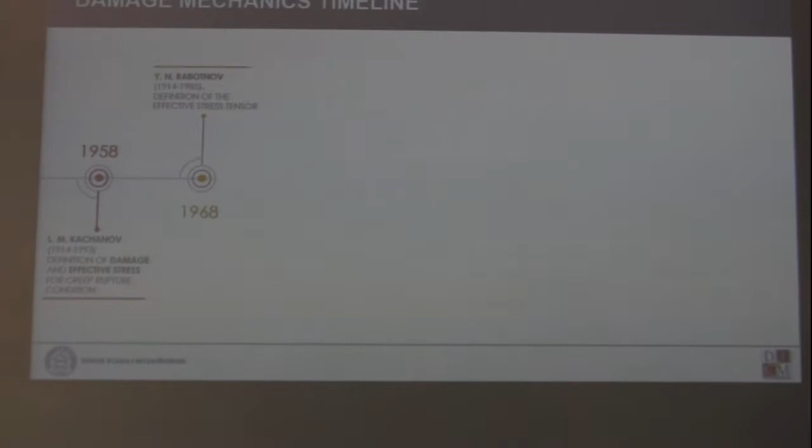Another seminal work was done by Rabotnov in '68, almost 10 years later. Going through the decades, a very important year is 1977, in which Gurson proposes, as a result of his PhD thesis, a continuum theory of ductile rupture by void growth. He first introduced the idea that a material that is pressure-insensitive can become pressure-sensitive as soon as damage develops in the form of microvoids.

Same year, the first concept and definition of continuum damage mechanics was introduced by Janson and Hult. Also in the same year, Lemaitre and Dufailly published the first paper on continuum damage mechanics, devoted to describing ductile damage mechanisms in metals and alloys.

Later, starting from this year, a number of papers were published, and a lot of work was developed mainly in France and in Europe, and just later in the United States, by Lemaitre and Chaboche.

They introduced in '78 the state principle for irreversible thermodynamics, which is the part of the work that I will address more in my presentation. Chaboche already in '81 proposed the use of continuum damage mechanics for ductile crack initiation in metals, and gave some guidelines on how to use this concept.

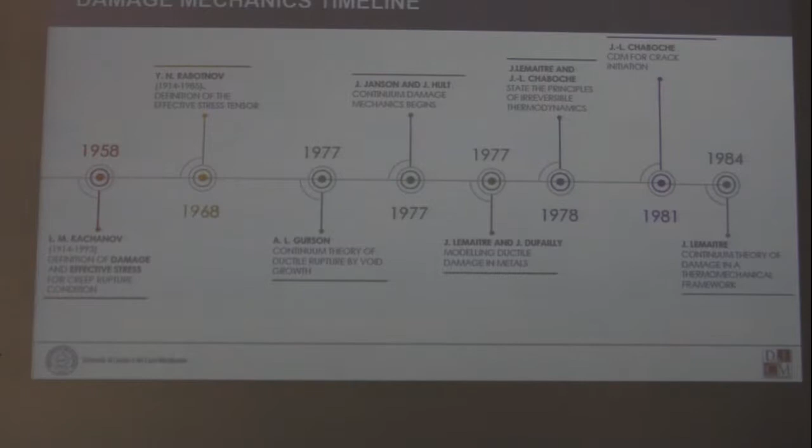Probably the most seminal paper is the one of Jean Lemaitre in 1984, where the first continuum theory for damage within the thermodynamic framework of irreversible processes was published.

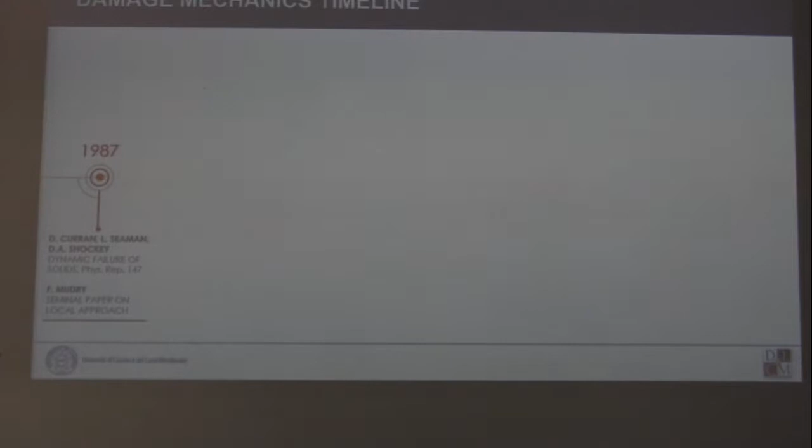In the subsequent decades, very important work was done in the Los Alamos community by Curran, Seaman, and Shockey. This community was highly focused on the high strain rate behavior of materials, so they were looking for a description of the material and failure of material under very severe conditions. I will spend some words also on this area, which is part of the area that I'm working in with my co-workers.

Already in '89, we see the first review of review papers on damage mechanics. It means that damage mechanics was already in '89 a consolidated body of knowledge, with a community that was working full-time in this area. Later, starting from '89, most of the work in continuum damage mechanics was dedicated to trying to correlate experiments with theory.

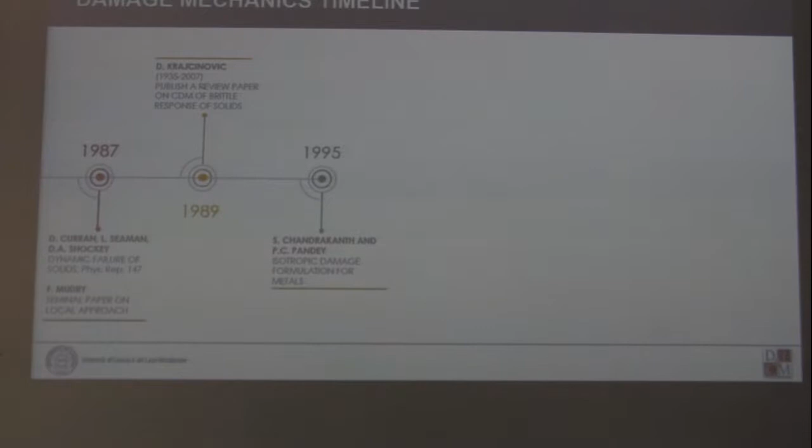Because up to '89, most of the work was basically theoretical, with no connection with reality, no connection with experiments, and this had some drawbacks that I will discuss immediately after this. In 1997, I published my first paper in damage mechanics.

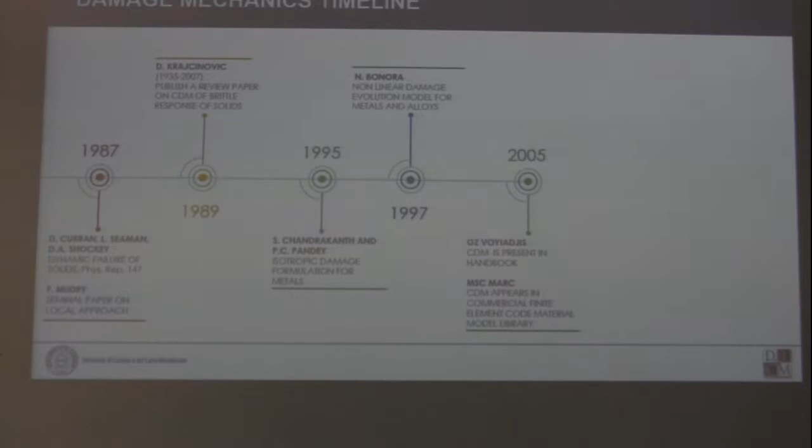I have to say that my work in damage mechanics comes basically because I was trained in a community at the University of Rome La Sapienza that came from modelers, but modelers who thought at that time that a model has to be theoretically sound, not necessarily supported by experiments.

So it was a turning point at that time. I would say probably in 1995 we see a shift from a different way to do research in the mechanical area, in which everything was theoretically equation made by hands, solved by hands. The beauty of the model was the consistency of the formulation, the possibility to find the closed form solution. Experiments were seen as something not necessary to support the theory.

For instance, if you go back now to the paper of Kachanov, it is today one of the most cited papers in damage mechanics, and you read it today for creep, it has nothing to do with the physical creep process going on in the material. So it's a completely useless paper, but it's beautiful from the theoretical point of view. You start from some first principle concepts, derive some evolution laws. The fact that it has nothing to do with reality is not important. There's no experiment, no experimental data point in any of these papers up to the beginning of the 90s.

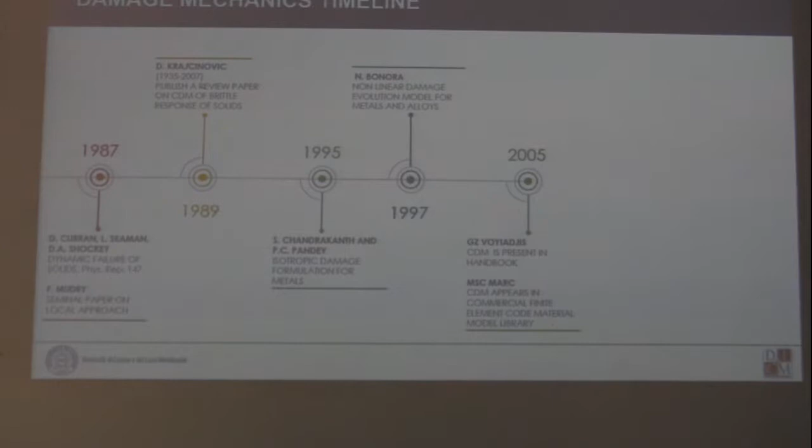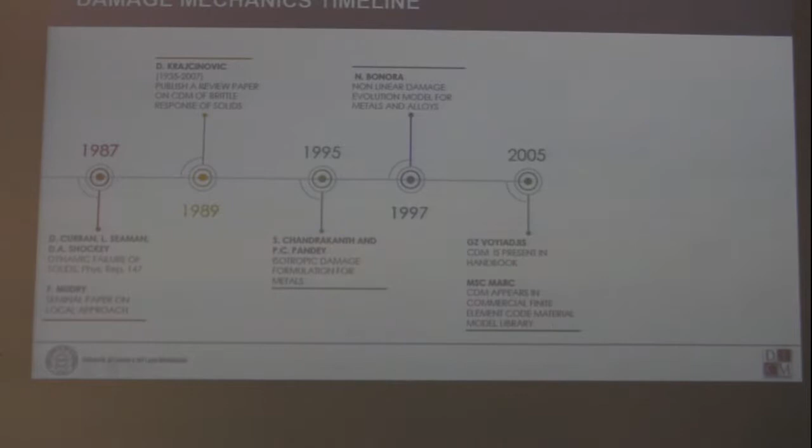Since then, this was also the year that I started working in the United States, and I had a different kind of approach, more practical, in which you have to show that what you are developing has a practical applicability. So you have to provide physical evidence of the validity of your modeling approach. We spent a lot of time trying to provide experimental evidence to support model validity and to validate models.

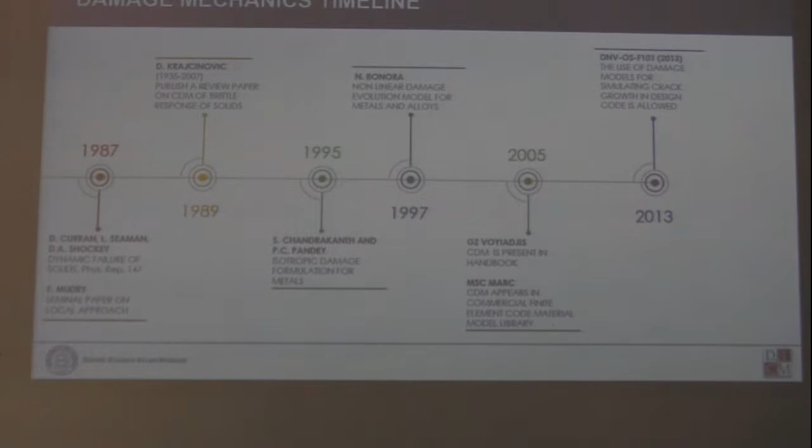In 2013, the use of damage mechanics is allowed for the first time in design codes, such as the DNV. The DNV F101 is the design code and prescription for pipelines. So for the first time, these new concepts are allowed into the design of real components.

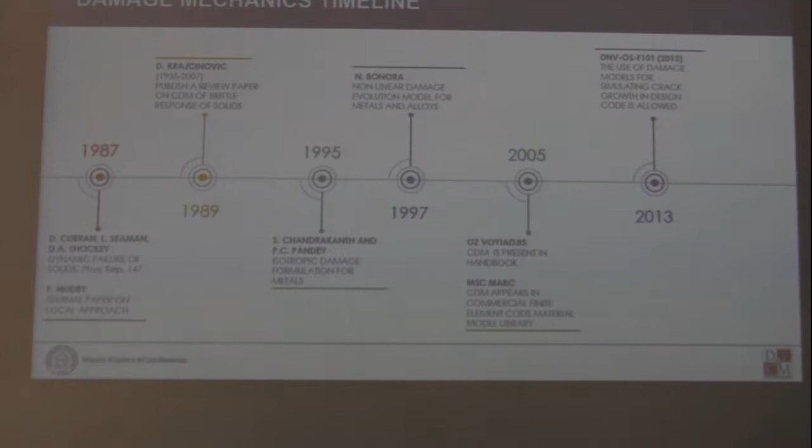During these years, I can tell that, besides a huge number of papers published in the literature, there are very few concepts that I call seminal concepts in damage mechanics that have been developed, and the value of continuum damage mechanics stems from the concepts that I'm summarizing in the next few slides.

The first is the concept of damage. The concept of damage in damage mechanics is different from the fracture mechanics community. The idea is that the classical crack initiation for fracture mechanics people is probably something in the range between 0.01 and 0.1 millimeter as an initial crack, or a physical crack, short cracks.

In damage mechanics, there is a more distinguished length scale in which there is a world before the initiation of a macroscopic crack that is assumed in the range of 1 millimeter, and below this length, this is the range where continuum damage mechanics works. As soon as you have a nucleation of the macroscopic crack, this becomes the matter for fracture mechanics concepts.

The other idea is the fact that there exists a critical state, and this final state corresponds to the macroscopic crack initiation. So we define in damage mechanics what is the end of some degrading process into the material that will turn out in the formation of macroscopic cracks, and continuum damage mechanics is dealing with everything that happened before.

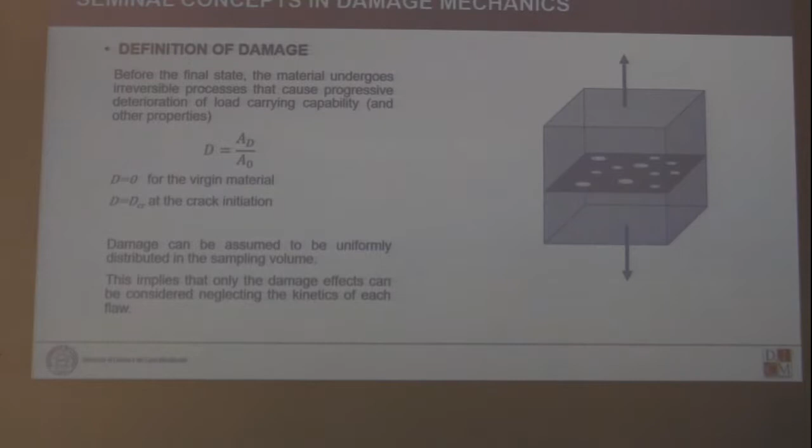This is really a turning point, because we detach from the physical description of the damage ongoing into the material, and we describe that damage state, which can be as complex as we want, as the sum of the effects that reduce the material's load carrying capabilities.

Another seminal concept in damage mechanics is the concept of effective stress. The effective stress is derived from this approach, in which we say that if we have some damage, we can deal with a material — this is the virgin material, where we have no damage. If there is damage, we have a distributed damage, and under stress sigma, or under a force F, we will have the force is sigma times dA, where dA is the effective net resisting area.

But instead of dealing with this complex problem, we can deal with a virtual material that has no damage, but has some degraded properties. This is a turning point, and in this equivalent material, the stress is no longer sigma, but a higher stress, which accounts not only for the reduction of the area, but also the concentration of stresses. In doing this, we have the possibility to get rid of the peculiarity of each damage form, shape, and evolution into the material, and just capture, outside the boundary of our body, what is the detrimental effect.

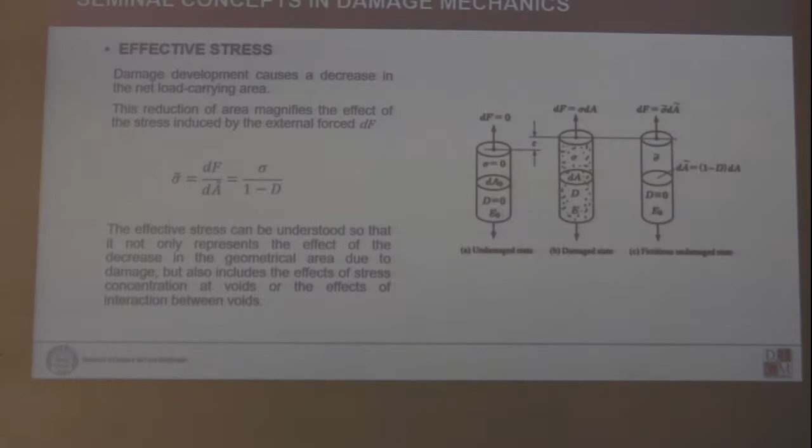This gives us also the possibility to develop a constitutive theory, which is derived into the framework of thermodynamics of irreversible processes using internal variables.

I summarize the three important steps necessary to develop a constitutive model in damage mechanics. The first is the definition of the state variables, which are defined as observable or hidden variables. The observable variables are those we can measure experimentally. The hidden ones come from the model, so they cannot be measured directly, but can be derived.

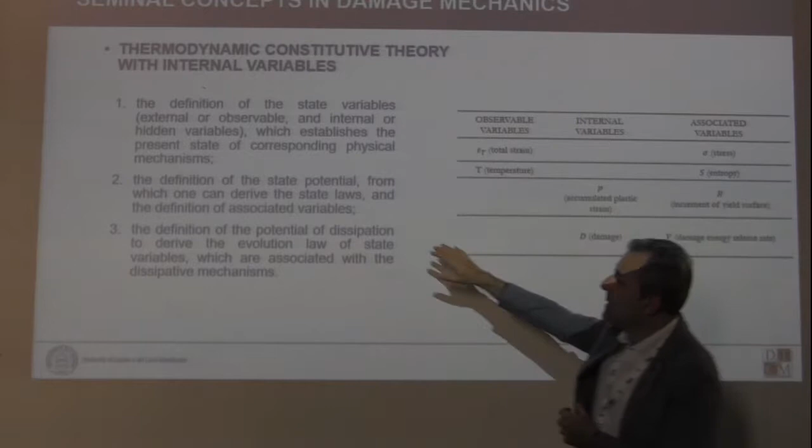We have to define the state potential, from which we can derive the state laws by derivation. Finally, we have to define the damage dissipation potential for the evolution of the state variables, which are associated with the dissipative mechanisms. These are just three basic rules and steps that can be used to develop a consistent thermodynamic model.

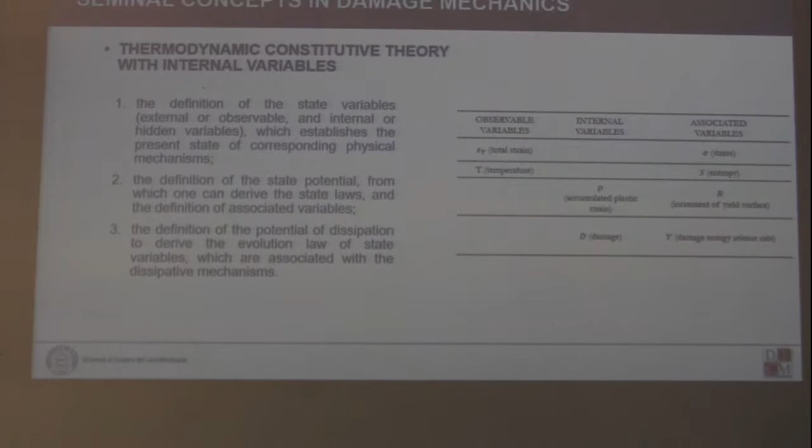In continuum damage mechanics, by the use of the effective stress, we can simply assume that the constitutive equations for a damaged material are the same set of equations for a virgin material that come from continuum mechanics, just simply replacing the stress with the effective stress.

So the system holds, but we have to introduce now an additional state variable, which is the damage, for which we need a damage evolution law. The damage evolution law can be derived by providing the damage dissipation potential.

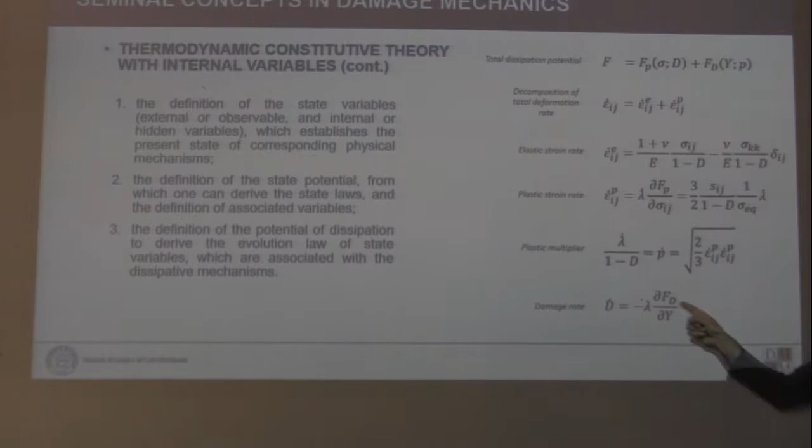The damage dissipation potential has to verify some principles. But at the very end, the important part is one of the beautiful seminal concepts derived in this framework.

For each variable there is an associated variable. Stress is associated to strain. Damage is associated to the variable y.

The variable y has a physical meaning, because y is the damage energy release rate, which is not the Griffith criterion, but is the strain energy release rate that is released when the damage state, which is distributed into a reference volume, releases the strain energy. So there is an equivalence also with fracture mechanics, because this is the same concept that Griffith formulated for a crack, for a propagating crack.

But here we don't have a crack. We have a smeared crack into the volume, and this quantity can be physically measured.

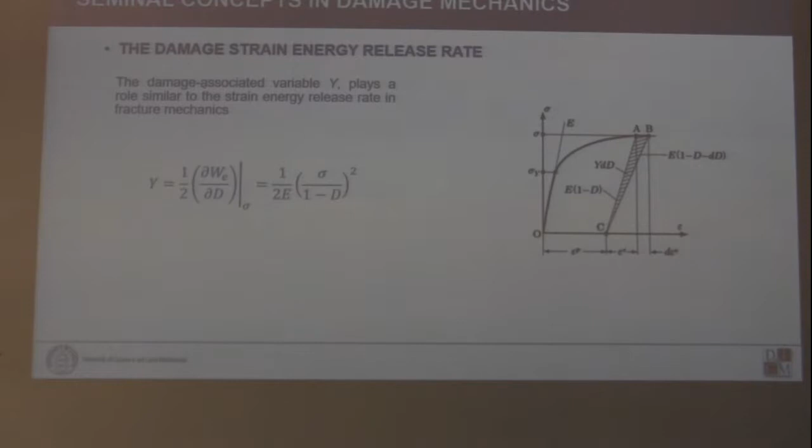Another beautiful result is the fact that the effect of stress triaxiality on ductility can be theoretically derived without the need of additional hypotheses, just by partitioning the strain energy into the volumetric and deviatoric part. We come up with a relationship in which y, the associated variable to damage, is a function of RV, where RV is a function of stress triaxiality.

This gives you directly, without the need of additional hypothesis, the fact that the more triaxial the stress state, the lower the ductility the material will exhibit.

This is a fundamental concept that was initially demonstrated experimentally in the 60s by McClintock and Rice and Tracy, but in this framework it just came up as a result of the formulation. We don't need any additional hypothesis.

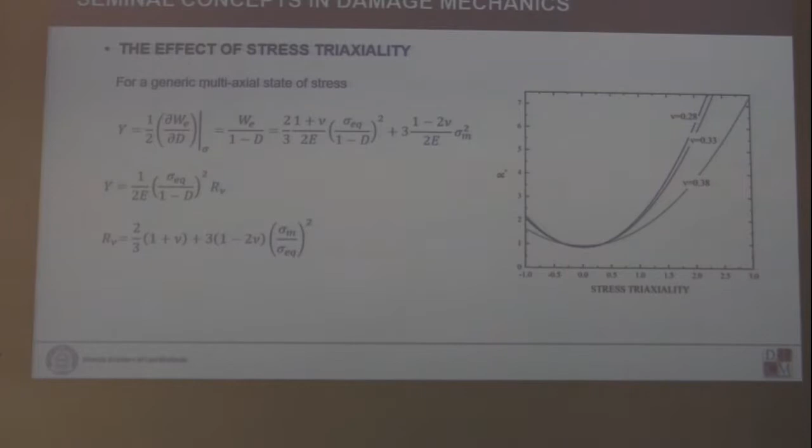Then the game goes into the choice of the damage dissipation potential. In the literature, a number of authors have provided possible expressions for the damage potential.

If you find an expression for your damage potential, then from this one you come up with the damage evolution law.

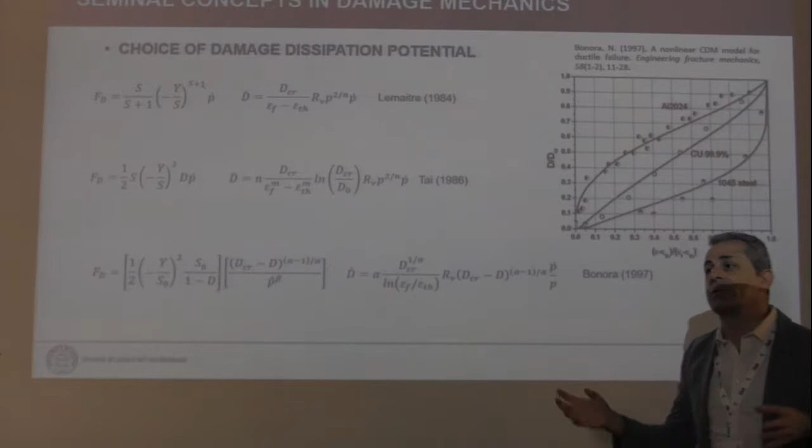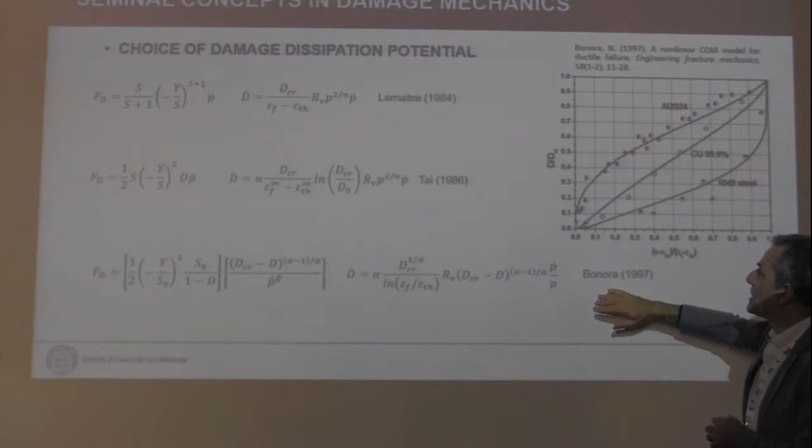So different damage evolution laws can be formulated. Some of them are very rough in describing the damage evolution in material, and again are not supported by experiments. I tried, at that time, to find a damage dissipation potential that could account for the plastic strain history and be capable of describing different damage evolution in different classes of material, to be as general as possible.

Another very important and seminal concept is the fact that if we have the effect of stress triaxiality embedded into our formulation, we can predict the so-called failure locus without the need of additional hypothesis.

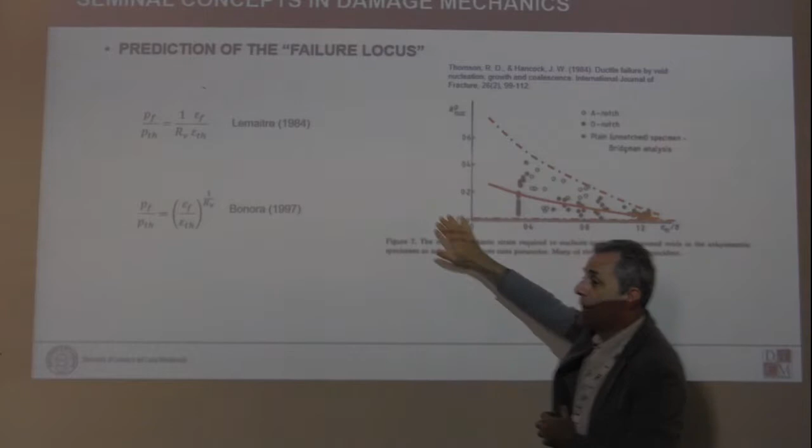The failure locus is the correlation, the place on a plot where we have the strain to failure as a function of stress triaxiality, and this place is theoretically predicted and can be verified by experiments.

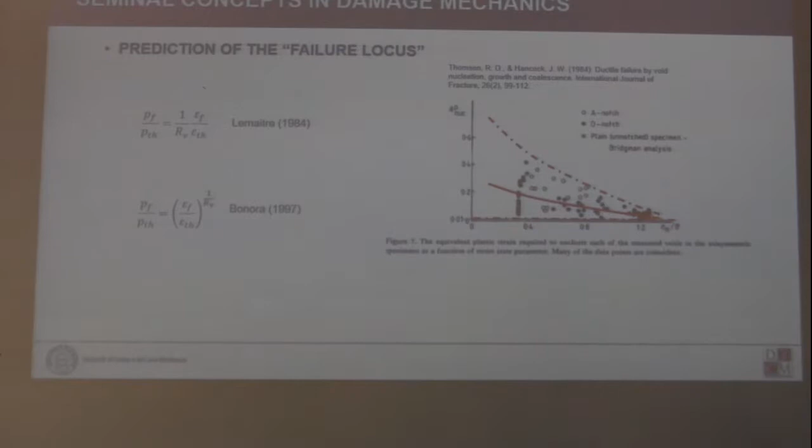There are different solutions in the literature, and of course you can validate this comparing with experiments that are usually provided by tension tests on round notch bars. I think this is one of the key points and the very big value offered by damage mechanics.

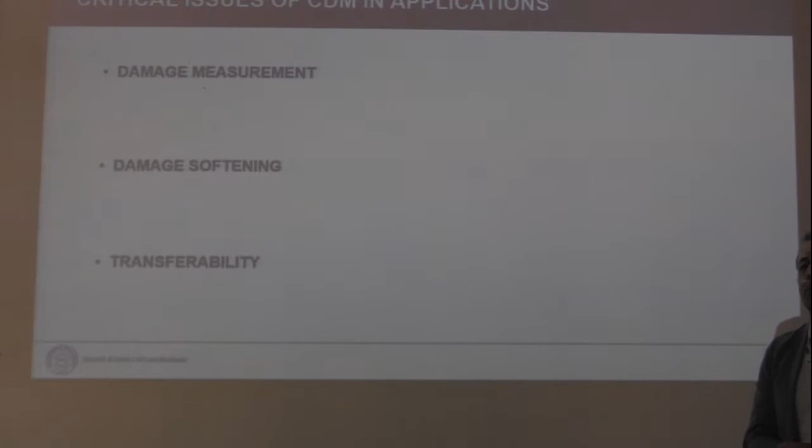Of course, there are a number of issues still under discussion. I will quickly go through three different aspects that need to be discussed, because today we are in a position where we want to transfer all this experience to the industry level, in order to use this concept to predict resistance of real components in service.

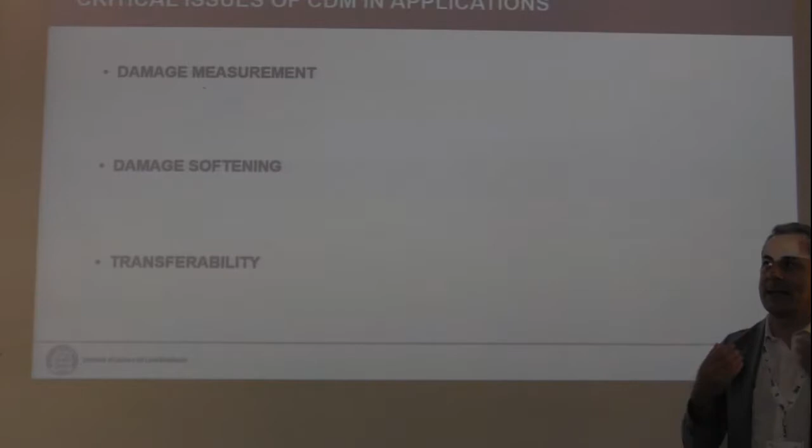There are three aspects. The first one is that, as scientists and engineers, we know what we can measure. If we cannot measure the quantity that we want to know, we don't have any clue, information, or possibility to know what's going on in that phenomenon.

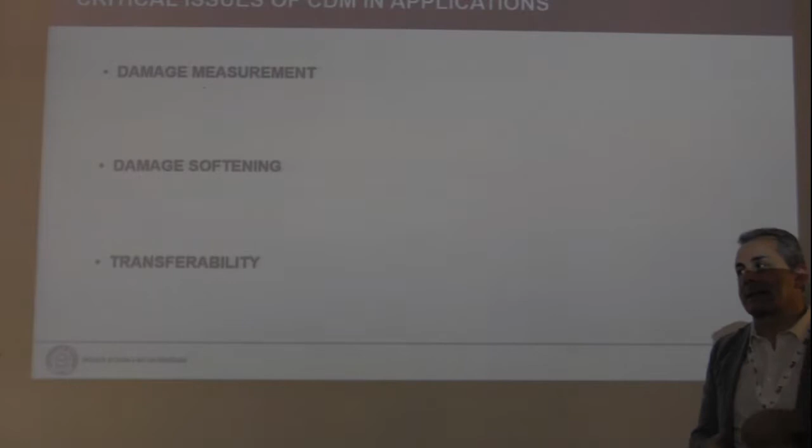So one of the requirements is, can we measure damage? The second is, I will discuss briefly the issue of damage softening, which for more than a decade took the attention of the research community. And finally, the transferability from sample to full-scale components and to different loading conditions.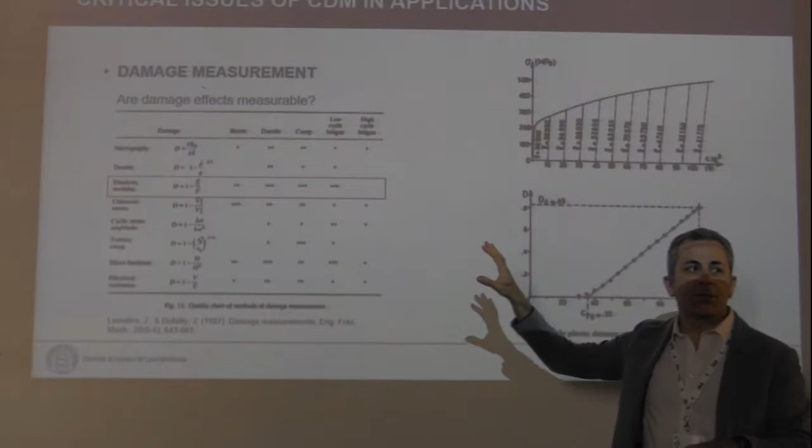Very briefly, in the literature, Lemaitre proposes several methods for measuring damage experimentally.

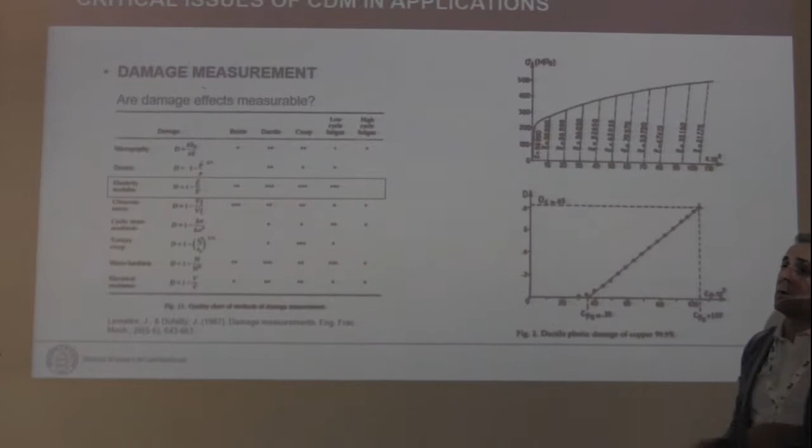The most commonly accepted method is the stiffness loss. You perform traction, loading and unloading, and you should see variation of the elastic modulus, which is proof of damage ongoing. The problem is that, unfortunately, this approach is incorrect, and we demonstrate this.

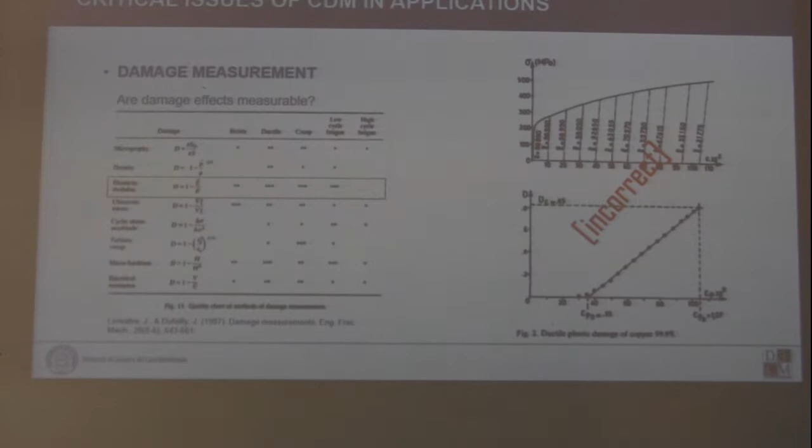The problem with damage is that there are so many different physical damage mechanisms in the material. If we look at brittle fracture, ductile rupture, high cycle fatigue, there are some common features, but there are a lot of mechanisms ongoing, and all of these are deeply embedded into the microstructure.

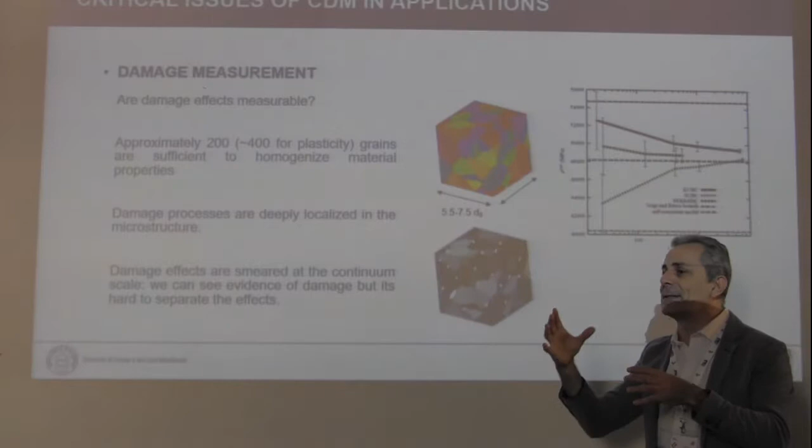From the computational point of view, a representative volume element is the minimum quantity that provides the homogenized properties of the material. There is proof that you need just 200 grains for metals, beyond which volume you can no longer discriminate the effect of grain orientation. So a volume five times the average grain size by five times returns the homogenized properties.

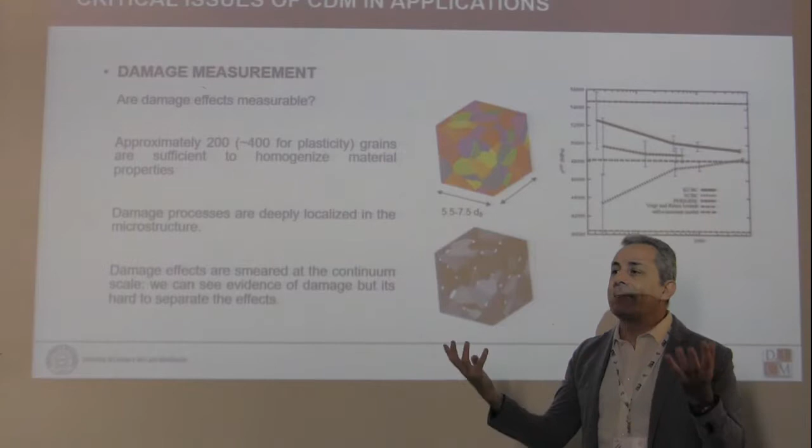Damage is a much smaller scale than this volume. So if we cannot capture the grain size effect at the overall scale, if you are sampling a material volume larger than this one, how can we sample the damage effects?

So the problem with damage is the fact that, at the very end... I think I'm running out of time, so I need to skip some of this.

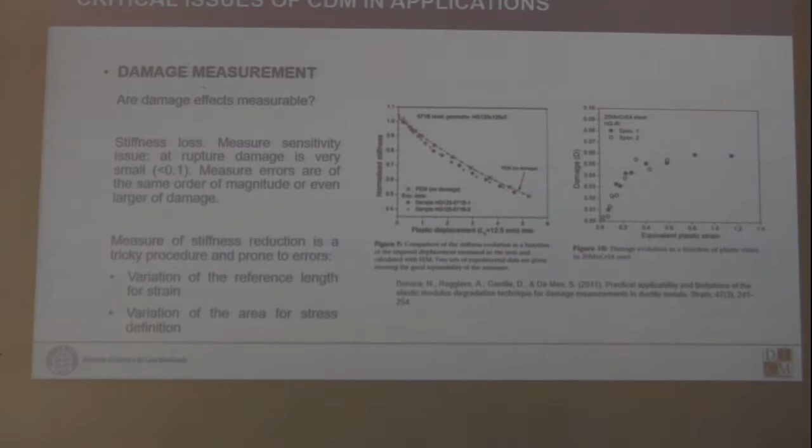The problem doesn't depend on the way you define damage. It can be defined in terms of porosity, it can be defined as stiffness loss, but there is very low possibility to measure damage effects at the continuum scale.

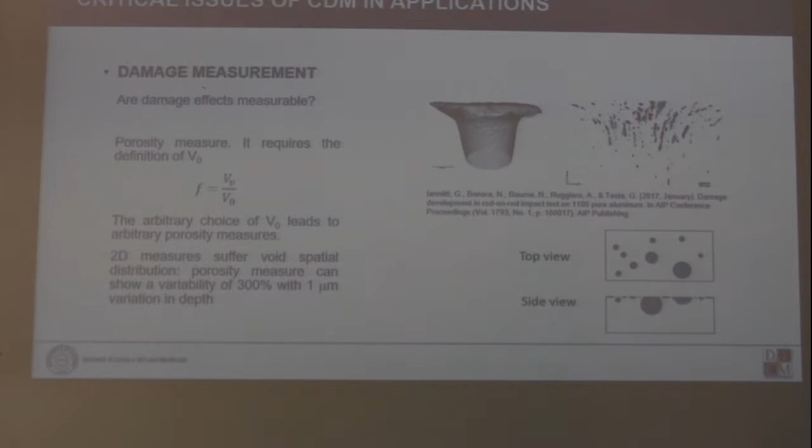On the contrary, we can measure very accurately the moment or the strain at which damage would start, and the moment or strain at which damage ends, once it becomes critical. These are two critical points, critical information important to identify the damage model parameters for a given material.

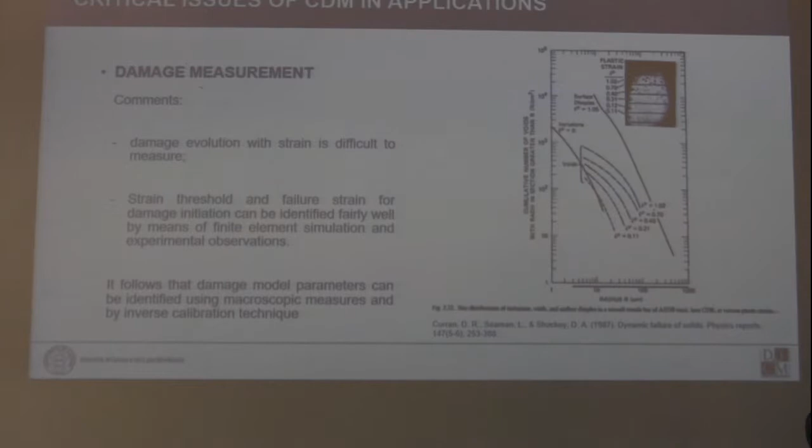A very seminal work was done by Seaman and Shockey, providing evidence that voids or particles become voids as a function of strain. They were the first to use a joined methodology using finite element simulation together with experiments.

Damage softening is a big issue. There are thousands of papers assessing the fact that as soon as you have damage, the material softens, and then it localizes, and this opens a lot of issues from the numerical implementation, because all the simulation results become mesh dependent.

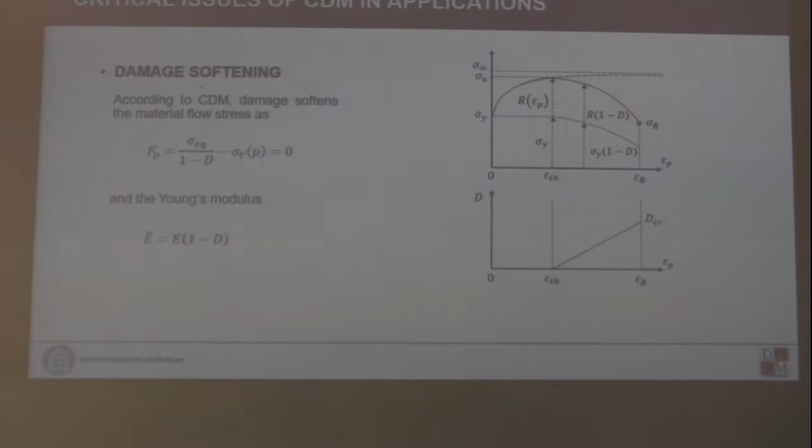Is damage softening real? I strongly believe that damage softening is not real. There is a big misunderstanding in the continuum damage mechanics history.

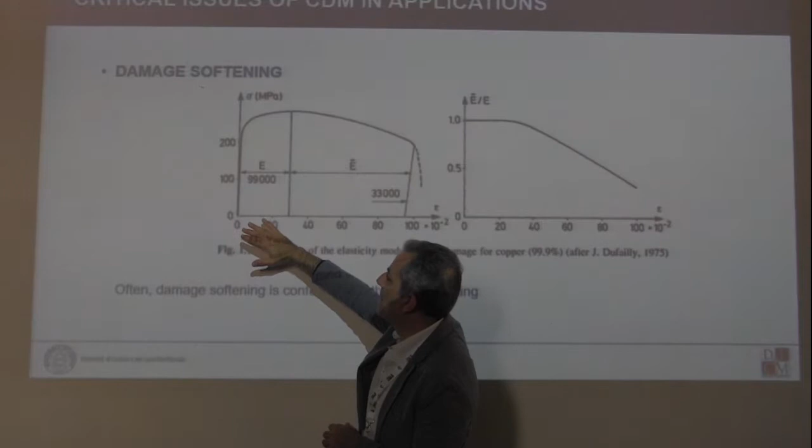This is a paper by Dufailly and the French school. They were identifying the initiation of damage as soon as the response of a tensile sample starts to go down, but in this way they were completely neglecting the fact that this was just a geometry response. This is necking, a plastic strain development for ductile material. It has nothing to do with damage.

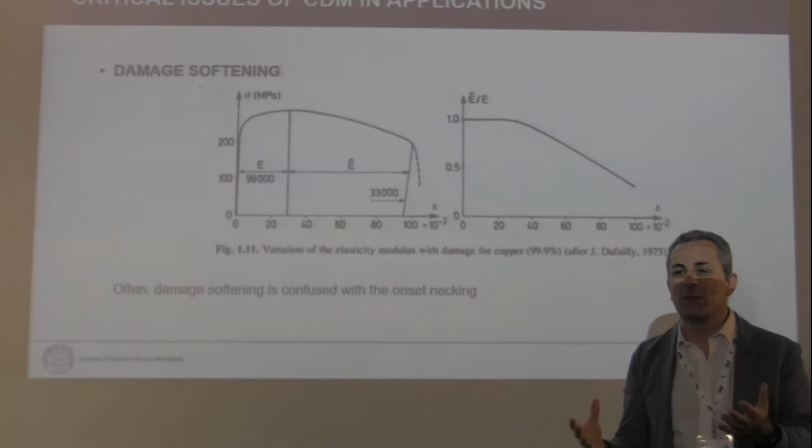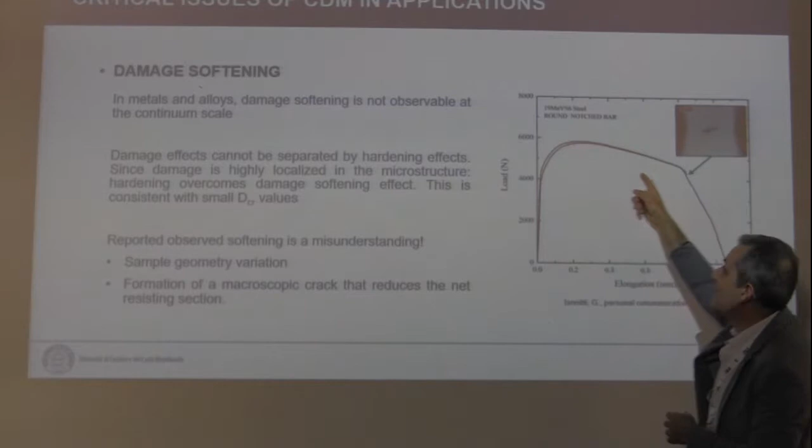Other people later, also in the French school, said okay, now this is not the initiation of damage, but damage initiation in a tensile test is when we start to see this change in slope.

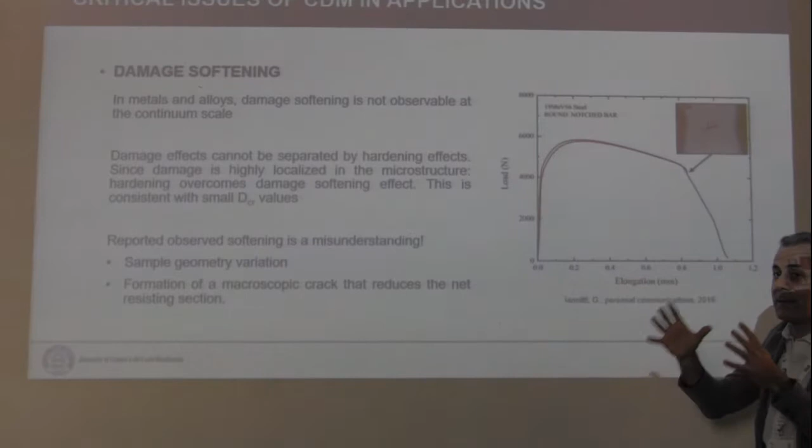We proved that this part of the curve is just an artifact from the test, coming from the stiffness of your machine. Already here, as soon as you stop the test at this point and cut the sample to open up the minimum section, you find there is already a macroscopic crack. So once again, softening cannot be measured at the macroscopic scale, just as damage effects cannot be measured at the macroscopic scale.

And so we can get rid of the softening. If you can get rid of the softening, your life is much easier, because your computational analysis is no longer mesh dependent. So the method becomes robust, and then you can use it in practical applications.

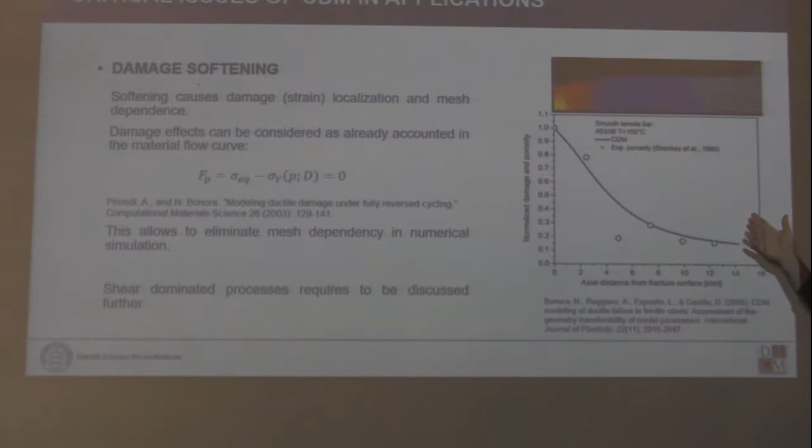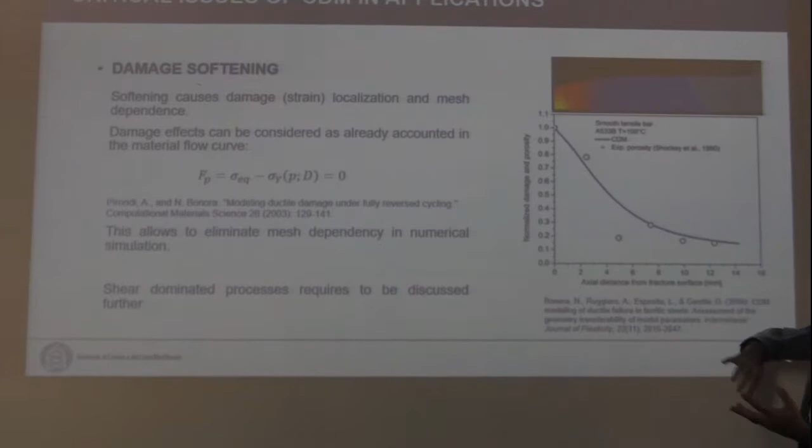Another issue was to provide physical evidence of the fact that if you calculate the damage distribution in your sample, you have to have physical evidence that the damage distribution corresponds to what you're expecting in the samples. In the past we made a true comparison in which we simulated damage evolution in a uniaxial bar, and this was our gradient along the axis, compared with porosity measurements provided by people in Los Alamos. If we normalize porosity with the critical porosity, and normalize damage with the critical damage, we get the same normalized graph, so we can compare just the distribution. If you use softening, you will have much more localized damage, which is not consistent with the experiments.

Transferability has to be proved with respect to the stress, to the complex stress state. So you go from the uniaxial stress state to the multi-axial stress state, but also to different loading conditions.

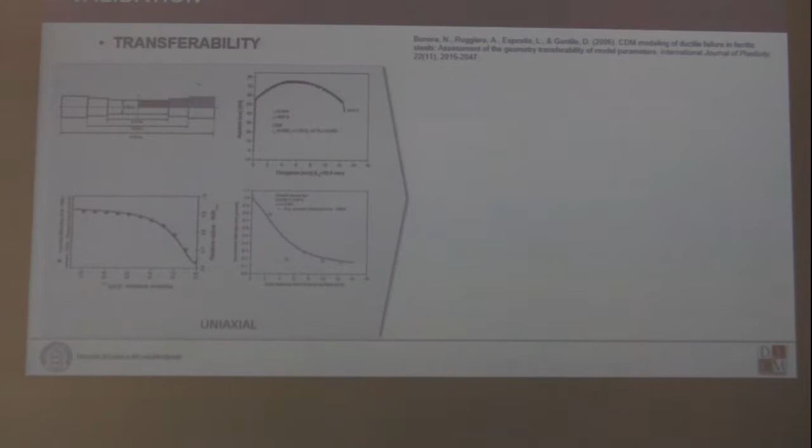In the past we spent a lot of time to demonstrate the transferability. We identify tests under uniaxial stress condition, then we transfer that to a multi-axial set of stress for notches, and this provides the basis for identification of the damage model parameters. Finally we predict, without need of further adjustment of the material model parameters, for instance the crack resistance and constraint effect in the crack resistance curve.

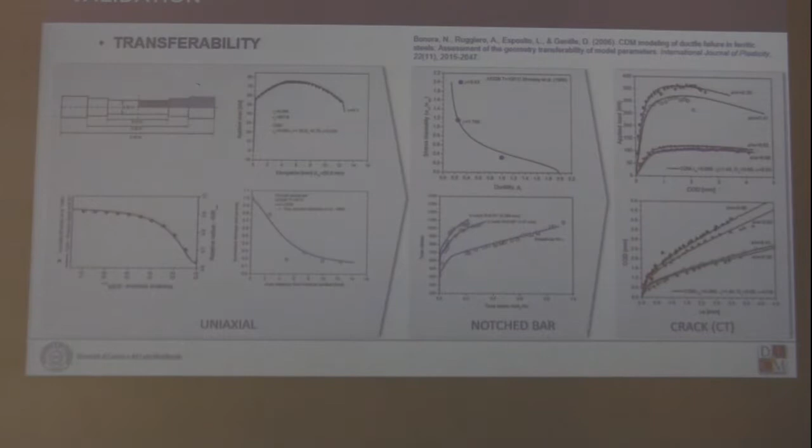Another possibility is transferability when you want to describe a failure process in which two mechanisms go at the same time. This is the case, for instance, for the ductile to brittle transition using the Charpy notch, in which you have brittle fracture and ductile fracture competing.

Again, if you use this damage mechanics concept together with, for instance, a probabilistic model like the modified Beremin model, it is possible to predict, without the need of experiments, just providing the material model parameters, the lower bound and the scatter band in the Charpy curve, the Charpy energy curve.

Just recently, we convinced an engineering company. This company was Saipem. Just recently, in the last 5 years effort, this methodology is now mature to predict the real life component, the real structural integrity of components.

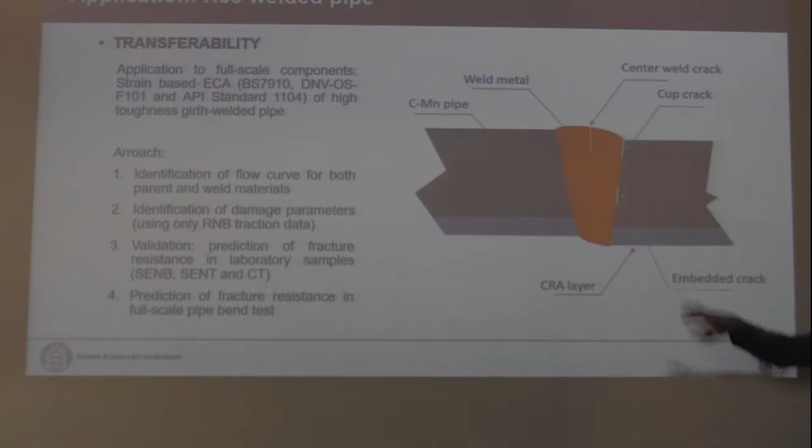So we tried to use this approach to perform strain-based ECA, engineering criticality assessment, for welded cracks in pipes, and we provided a practical approach.

This approach relies on the fact that you have to first identify the flow curves of your material, and this is tricky because it is dedicated to computational simulation. So we provide a procedure how to do this for the parent and weld materials.

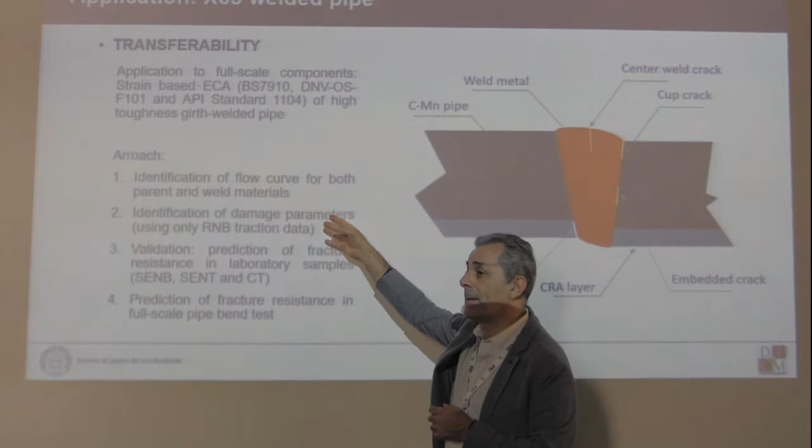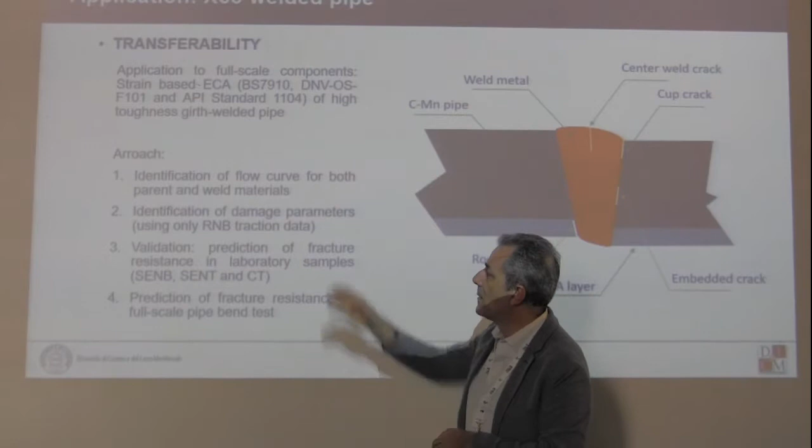We identify the damage model parameters by performing very simple tests at the industrial level, traction tests on round notch bars, identified by retrofitting these failure data with finite elements to generate the damage model parameters. We validate these model parameters by predicting the fracture resistance in laboratory samples, and then use the model to predict fracture resistance in real life, in full-scale tests.

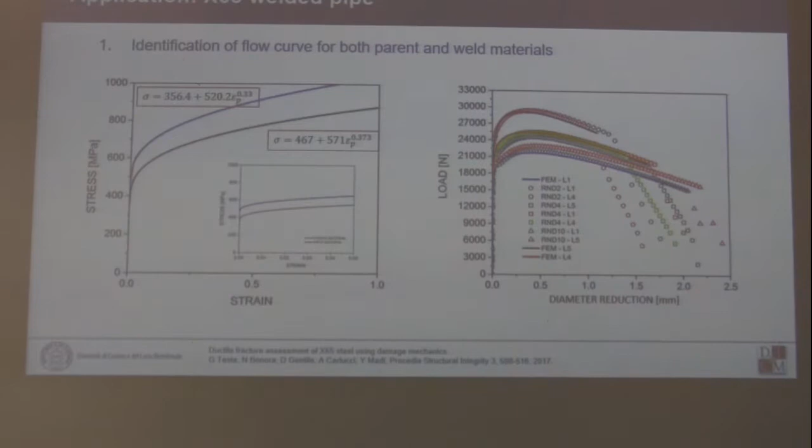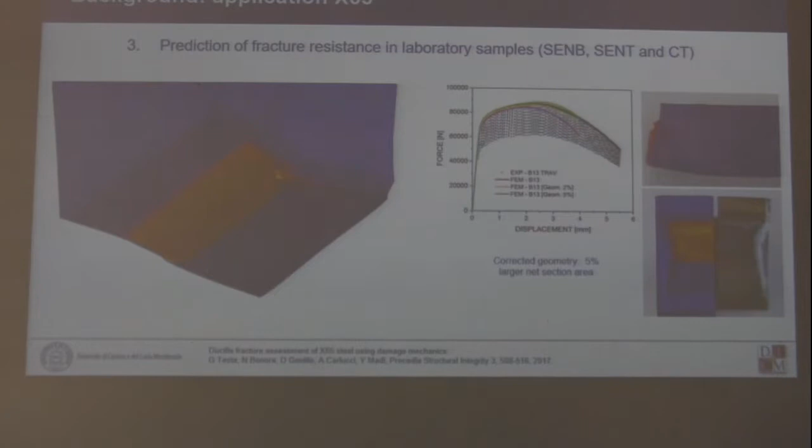I will quickly go to the final results. This is the validation for SEN-B, SEN-T, and CT. Again, when we identify the damage model, we don't change anything more. We don't have to go back and forth with new experiments to adjust the damage model parameters. This provides the basis for transferability, and you can predict the crack resistance curve.

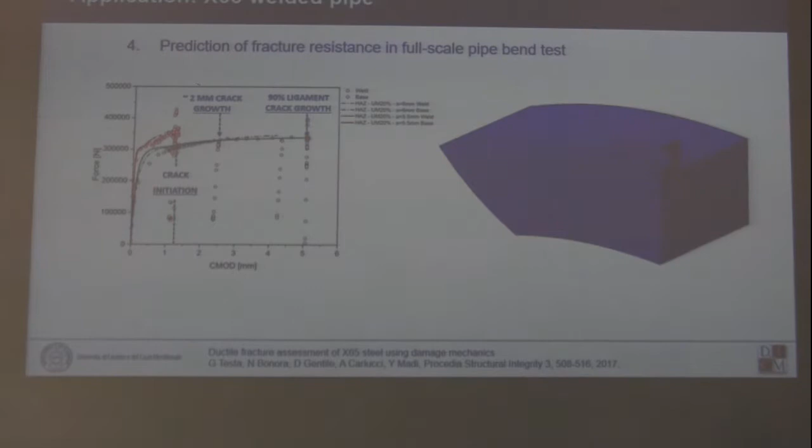And when we move to a full-scale test, as in this case, this was a full-scale plant in Germany that was monitored, we were able to predict the overall response, the time from crack initiation, the extension of the ductile crack growth, and all the features that the pipe was showing in the full-scale test.

The final point is that if the mechanism is the same, the model has to work in different scenarios, different conditions. Working with people in Los Alamos, I was challenged since '96 by Rusty Gray. He always was challenging us, saying can you predict this? Can you predict this experiment? Can you predict failure in these experiments? One key point is predicting spall fracture in impact.

In the spall test, you have a disk impacting another disk. This is the target, a thicker disk. Because of the high velocity impact, the shock wave generated in the material goes as a compressive wave, is reflected as a tensile wave, then builds up with the release wave, and then you have a spall fracture occurring here.

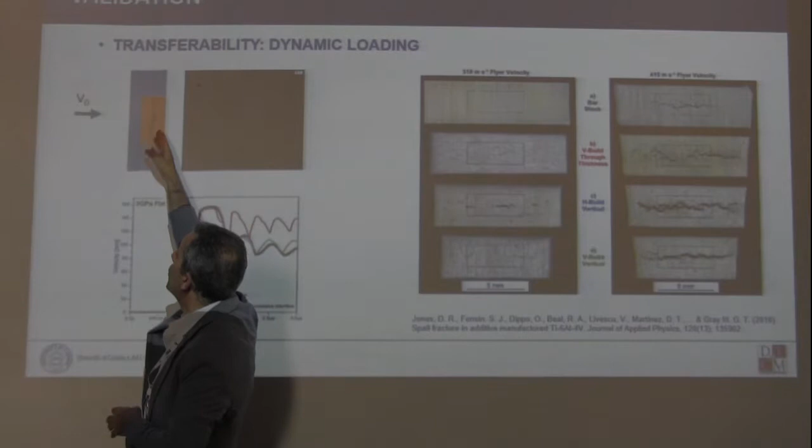During this test, you can measure using laser interferometry the velocity of the free surface, and get this trace. The question is that as soon as you have fracture, you have some release waves coming into the problem. This is a very interesting test case, because here you have strain history, a pressure wave going back and forth into the material. We know exactly the time where damage develops.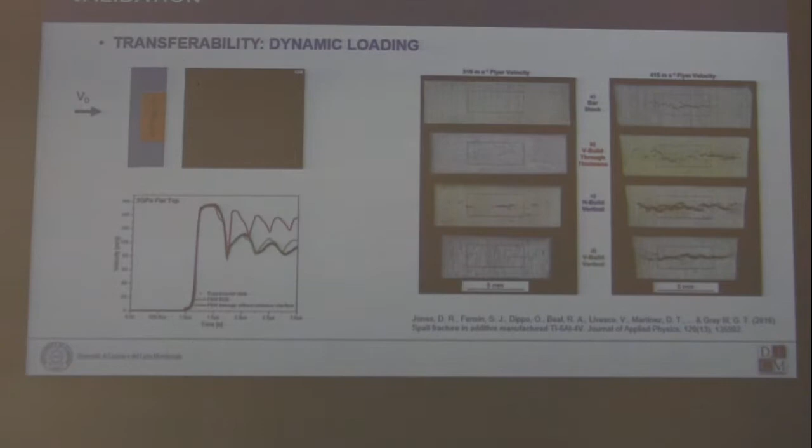Triaxiality is huge, because triaxiality in this case can go up to more than 10, which is something you can never reach in geometry. And this is a very challenging task.

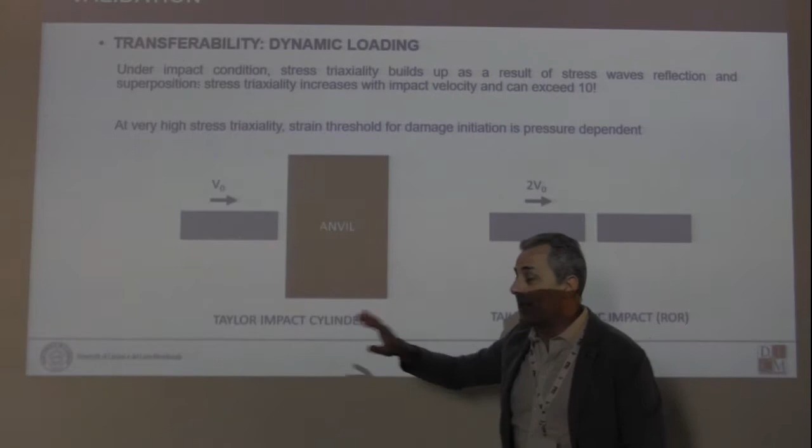Another task we were very successful in predicting is the impact of a cylinder versus an anvil, called the Taylor impact test, or rod-on-rod test, where you have a cylinder impacting another cylinder. For the same material, equivalent material, equivalent velocity, if you do this test for a ductile material, you will never get damage. But you get damage in this case. So a model has to discriminate between the two tests.

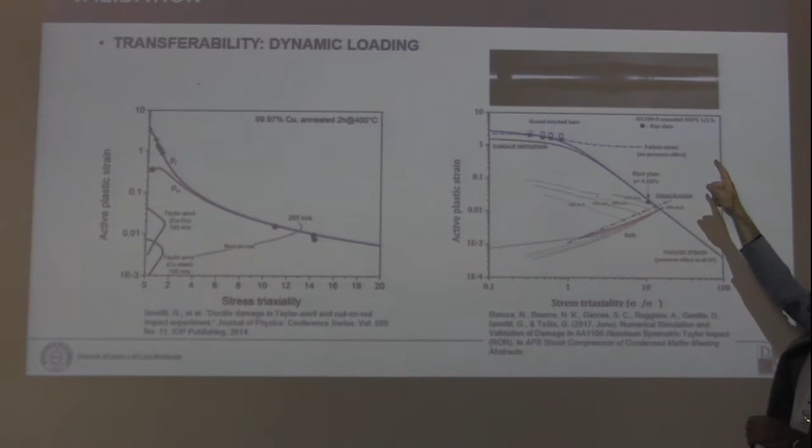We demonstrated that our continuum damage mechanics modeling was capable of separating the two effects, predicting that in the rod-on-rod case, shown on top in that video, where you shoot a cylinder against another still standing cylinder, you generate a lot of damage. The answer is found in stress triaxiality: this is the stress triaxiality evolution in time, and therefore in strain, for the Taylor impact. For the equivalent condition, the stress triaxiality for the rod-on-rod follows a completely different stress path. So damage can occur in the rod-on-rod, while it cannot occur in the Taylor test.

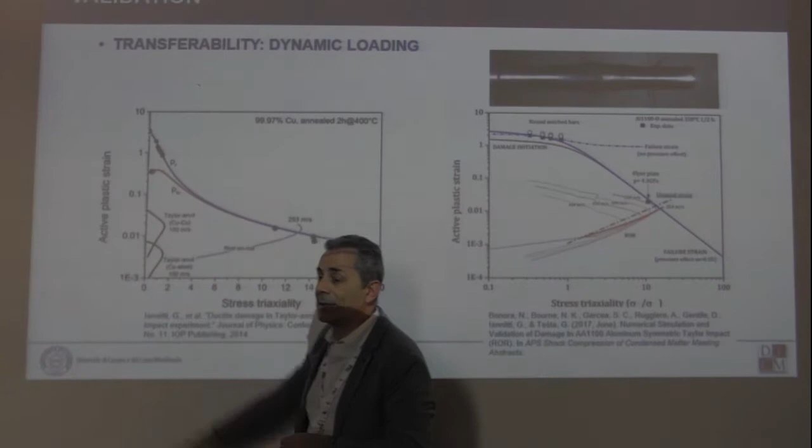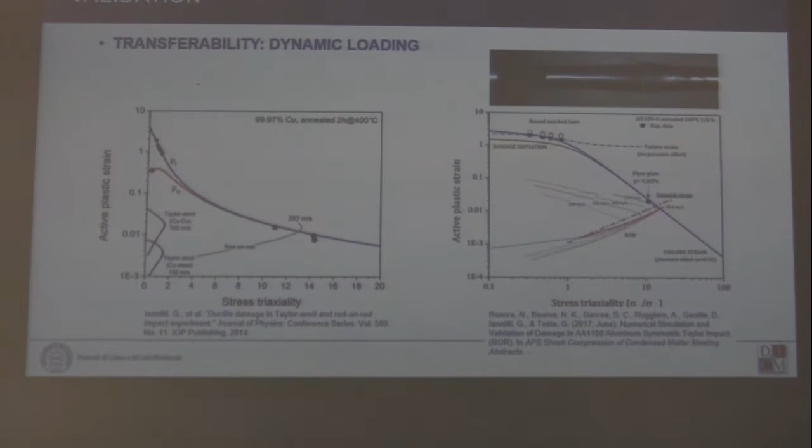We provided the rationale, and also demonstrated that our model was capable of predicting this behavior, while other kinds of modeling specifically developed for high velocity impact failed to discriminate this behavior.

What's next? Where is the research going right now? The research in continuum damage mechanics is now moving toward shear-controlled fracture. There was a lot of attention in the last 10 years on the possible role of shear, described by the load angle parameter.

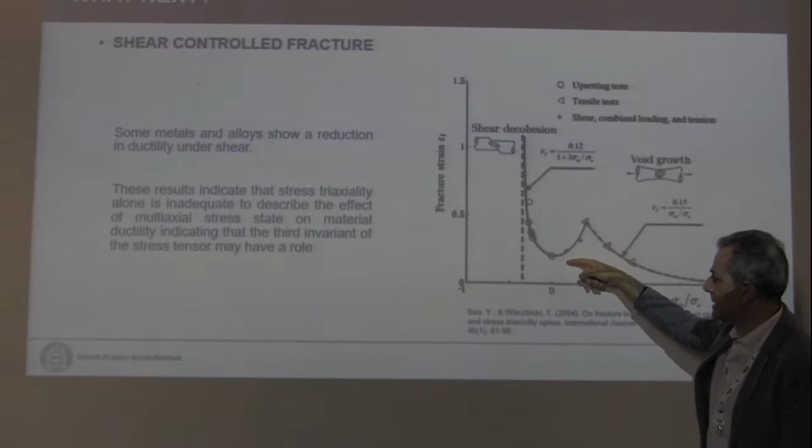Everything relies on this plot provided by Bao and Wierzbicki, in which there is a cusp in fracture strain versus stress triaxiality: the uniaxial strain to failure is here, this is torsion, and this is the negative stress triaxiality range. There is a lot of effort in trying to predict material behavior there.

There you need a different kind of model formulation. For instance, the formulation I just recalled doesn't account for J3, which is the third invariant of the deviatoric stress.

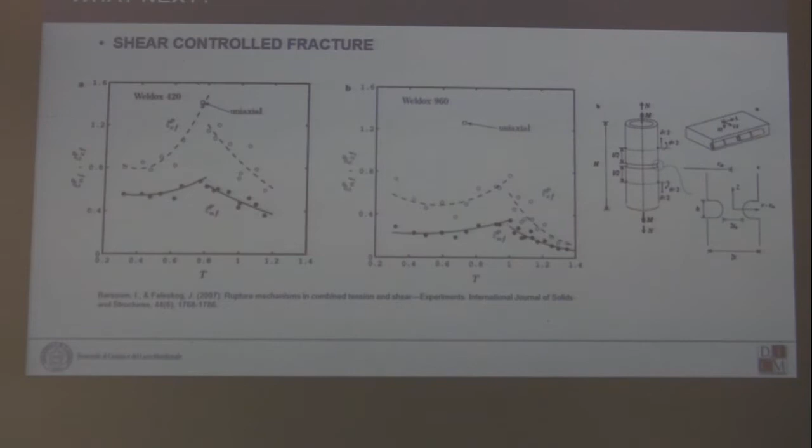Actually, there is evidence that this behavior can be observed in different materials. This is for Weldox, and a number of specialized samples have been proposed to test material in this condition. We recently extended the original damage formulation I proposed in 1997 to account for shear-controlled fracture.

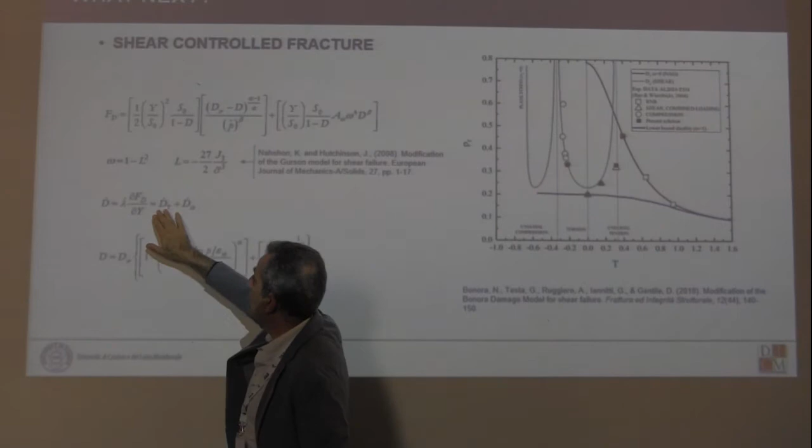We succeeded, in a very simple way, by modifying the damage dissipation potential to obtain a damage rate equation with stress-triaxiality-controlled plus Lode-controlled terms, allowing us to predict failure and the cusp in the failure locus plot.

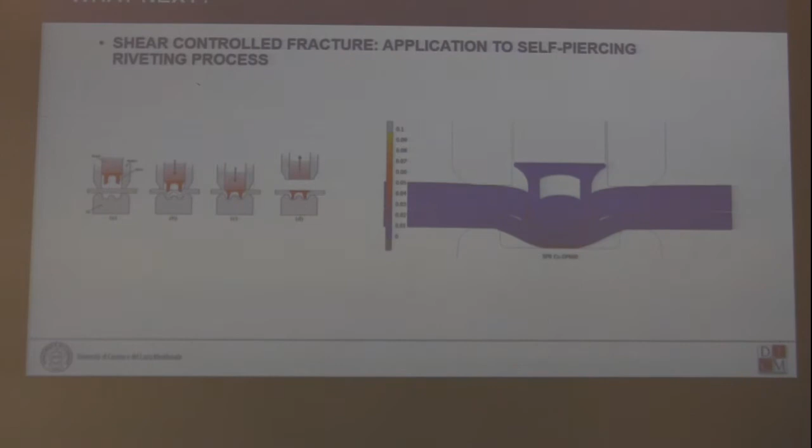But the question remains today: with this method, we were able to predict, for instance in shear in self-piercing riveting processes, this kind of failure, which cannot be predicted with more traditional damage models. Here you have shear fracture occurring in both materials—this one being more brittle than the lower sheet.

So there are some cases where you will need this additional damage modeling for shear. But we are still discussing whether this is real, or whether this is also an artifact.

Just recently, Ravi-Chandar revised the experiments of Bao-Wierzbicki, and proposed a much more detailed method to measure strain at failure using grain deformation in the fracture surface. He found that the failure locus is probably here, while others measured this instead.

So there is a lot of discussion ongoing about the real material behavior under shear. This is part of the work that probably needs to be investigated more from the experimental point of view, in a very controlled way, in order to provide reliable data that can support modeling.

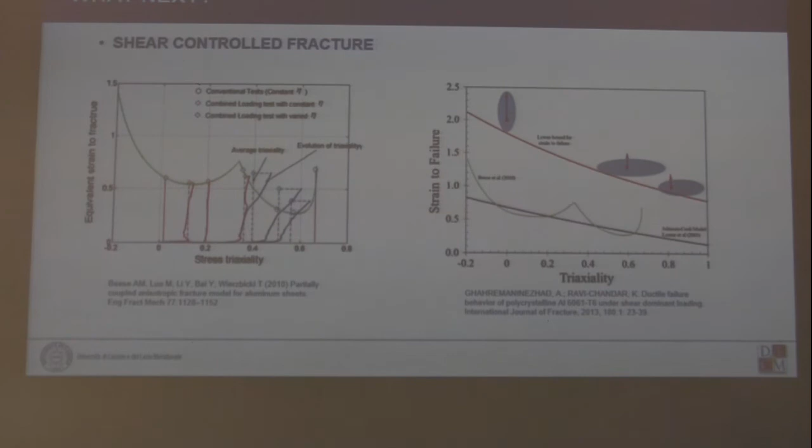A very interesting and conclusive result is provided by David Rittel at Technion in Israel. He developed a shear disk that overcomes much of the issues of the samples Bao-Wierzbicki used in the past, and he found a very different behavior.

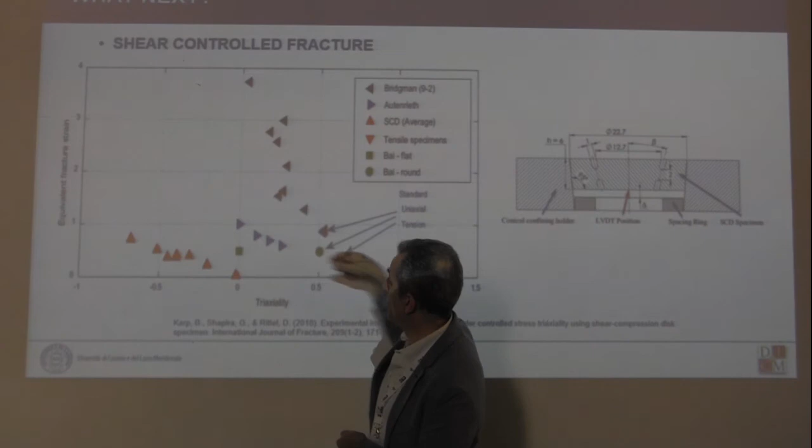For instance, this is the failure plot in the positive stress triaxiality regime. Then you have a drop, followed by a straight line in the negative stress triaxiality regime. These are much more reliable results. So if this is the real case, then we need to revise our model to predict this behavior in this regime.